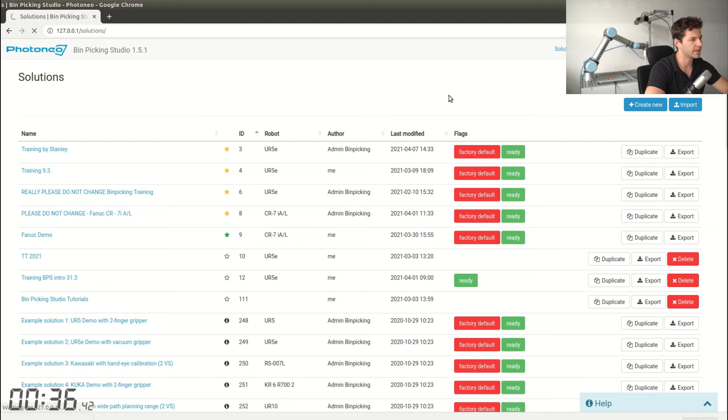It will take something like 10 seconds usually. I will provide a descriptive name, so it will be bin picking speedrun, for example. I'll omit description for now.

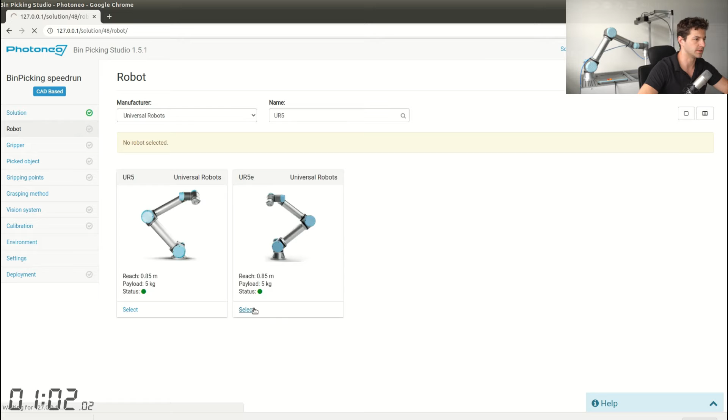The robot is actually Universal Robot UR5 and it is E-series. Inside the robot there is already a bin picking program, a simple program which will be executing functions like scan, get trajectory, execute trajectory, move to the placing position and similar.

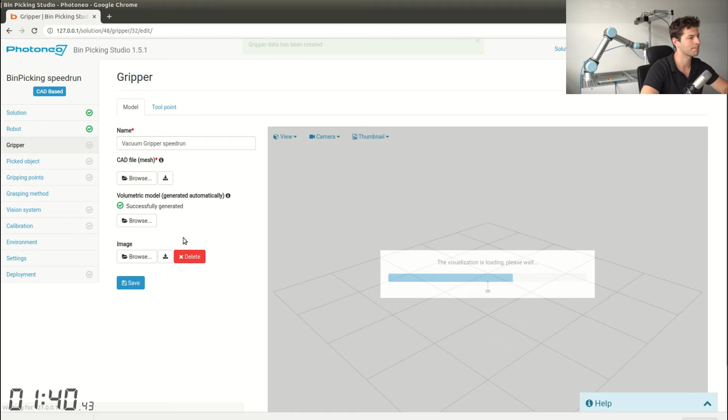For the gripper, I'm going to create a new one from scratch. It will be gripper speedrun. Maybe provide a more descriptive name like vacuum gripper speedrun, and I'm going to open up the CAD file of my gripper mounted on the robot, and here it is.

Double check if the origin of the file is on the bottom, and yeah, it's good. I'm going to use it.

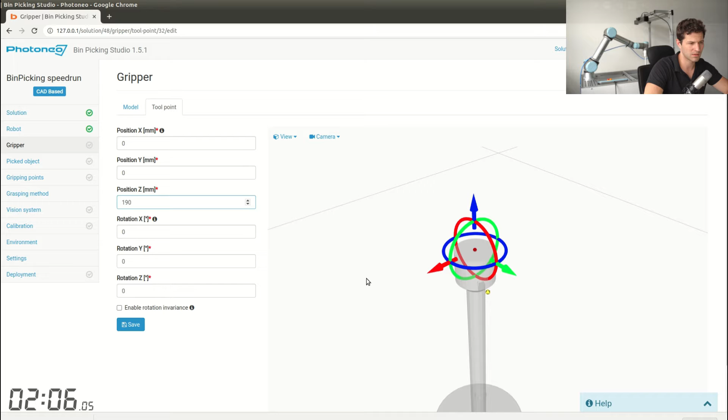To set up a tool point, I will use those arrows in here and move it to the favorable position at the end of the gripper, maybe round it up to 190 millimeters. Okay, it looks good to me as it is right now. You can see that the gripper is symmetric, so I'm going to enable rotation invariance in Z-axis and save it.

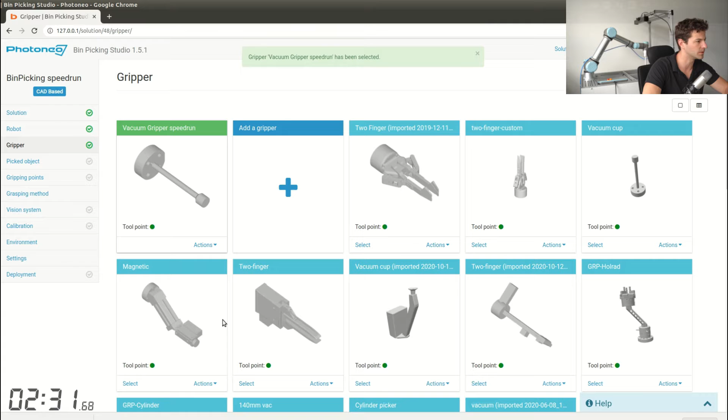For the part, I need to set up some gripping points on the surface of the part, and it's a simple process, just like for the gripper. It is a plastic T-fitting. Alright, insert CAD file and save.

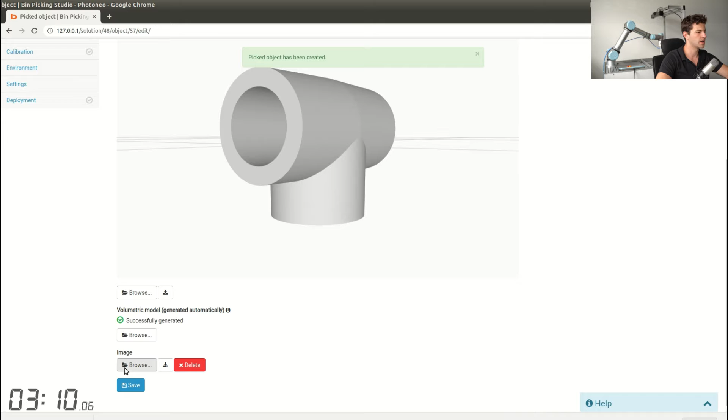Similar to a gripper, a volumetric model is generated for collision avoidance. I can examine, okay, my model is correct, and hit the save button.

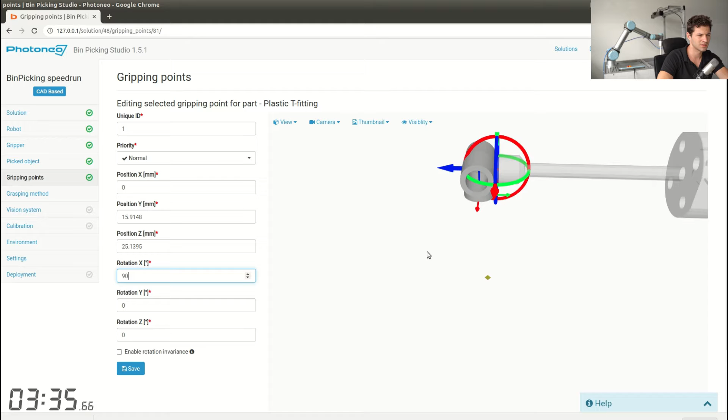For the gripping points, I'll choose my workpiece and I'll add a new set of gripping points via similar visualization. First of all, I'm going to rotate the gripper for 90 degrees, so I'm going to pick it from the side, and maybe move it a little bit in this direction and this direction, so it is in correct position, something like this. This looks like a good position for gripping.

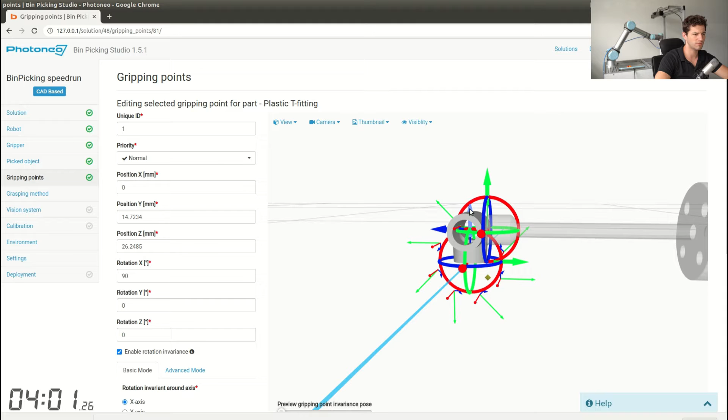Also, this piece has a little bit of symmetry itself, and I'm going to enable it, and I see it is an X symmetry, so this axis is loaded in here. I just need to move it using these arrows again to the correct position, to the center of the opening.

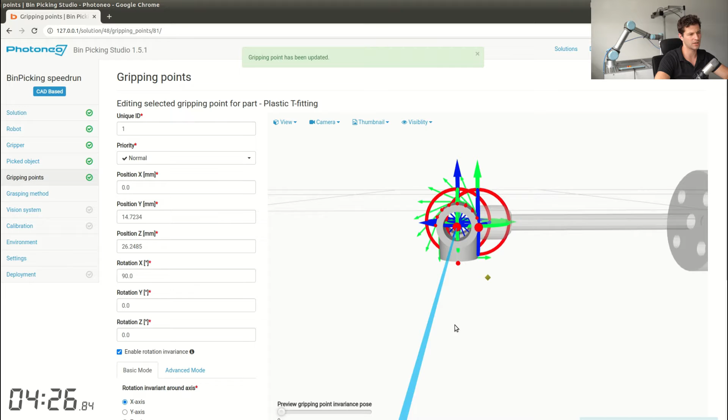Also, since I don't want to do a full rotation, just half of it, I will limit the upper limit to 180 degrees. Everything else looks good to me, and this is what I have right now.

8 different gripping points, actually 9 different gripping points all around the surface of the plastic workpiece. Hit the save, just double check, okay, it looks good to me.

Going forward, for the grasping method, we have multiple path stages. These are waypoints which are generated during the path planning, and these waypoints are like a blueprint for the trajectory. We will begin in the start waypoint, going through all of these, and end in the end position.

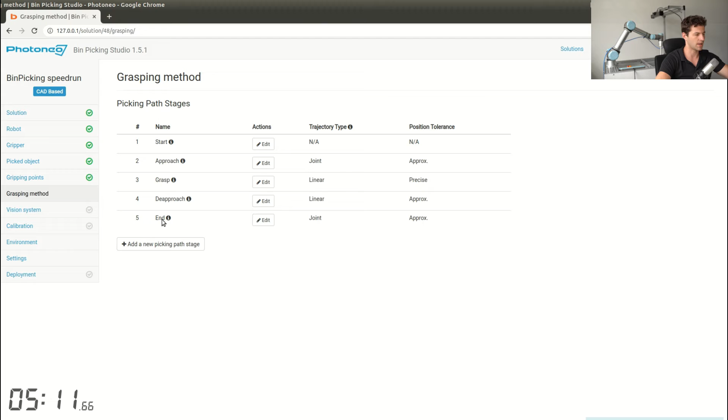Start and end position are loaded from the teach pendant and they are saved positions. So what I can do is just bind some kind of procedure to them. Detach procedure inside the robotic program is a procedure which has digital output set to 0. So I release the gripper before I'm going to do a bin picking.

The approach waypoint is the first calculated waypoint, and it will take a grasping position, something like this, and generate an offset. I'll use the coordinate space of my workpiece to generate this offset, and set it to 20 millimeters, enough in front of the object. If my object moves, this waypoint will be calculated in a different place.

What I'm going to do as well is enable attach right here, because I have a vacuum gripper, and the vacuum gripper may be enabled in front of the picking. So I'm going to enable vacuum to touch the workpiece and literally suck it into the gripper.

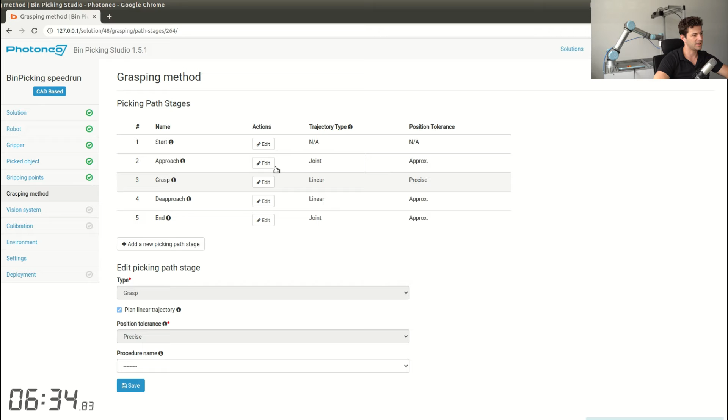Save the position. Going to grasp. Since I enabled vacuum in the approach position, I don't need to do anything else. Going to the deapproach position, and now the deapproach is the third one calculated. Actually, the grasp is calculated first, then the approach is offsetted, and the deapproach afterwards is a waypoint which serves for going out of the bin.

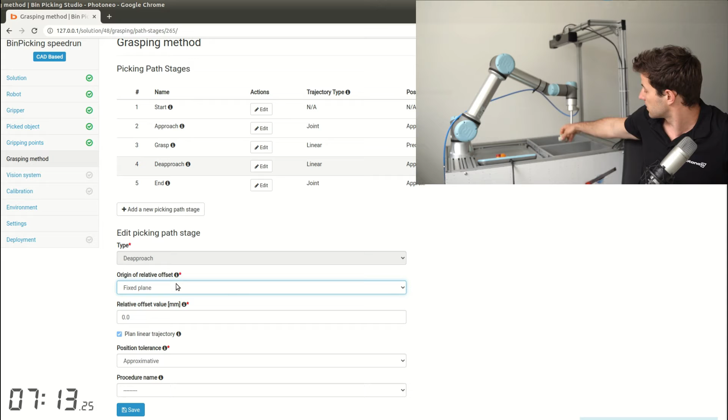Usually we use a robot coordinate system, or a fixed plane, basically an XY plane offsetted from the base of the robot by some amount. Since I want to remove the parts about 5 centimeters above the bin, and the bin ends literally at the base of the robot, I just need to put an offset value of 50 millimeters here. Very easy, hit save. So all of the parts will end up 50 millimeters above the base of the robot, which is in fact above the bin. Hit save, and that's it.

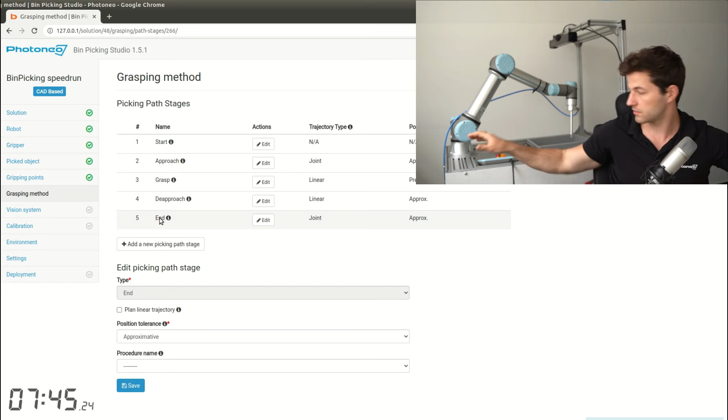After the deapproach, we go to the end position. The end position is transmitted from the robot program into Bin Picking Studio, so I don't need to do anything else. Inside the robotic program, the bin picking ends up in the end position, and then there are a couple of MoveJ commands which will just navigate the robot to the placing position, and that's it.

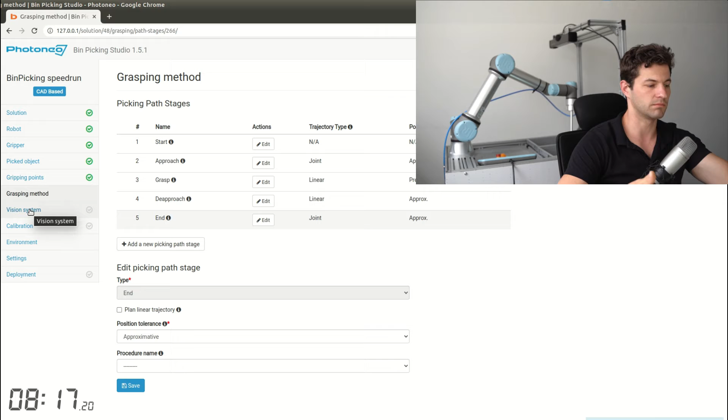So these are the picking path stages, serving as a blueprint for path planning. Combined with the environment, they will generate a collision-free trajectory.

The vision system part is used to bind together the workpiece, scanner position, and some other parameters. So I'm going to create a new vision system. We can have up to 4 different vision systems per one solution. This vision system is loaded in the background.

It will generate this form. I will put the vision system name, for this one it's 'T fitting'. The scanner ID will be used—the scanner I have attached on top of the robotic cell, which is 1709005. It is the scanner M size model, and it's based on the robotic cell. The picked object will be a plastic T fitting, since I have only one, and I need to create a localization profile.

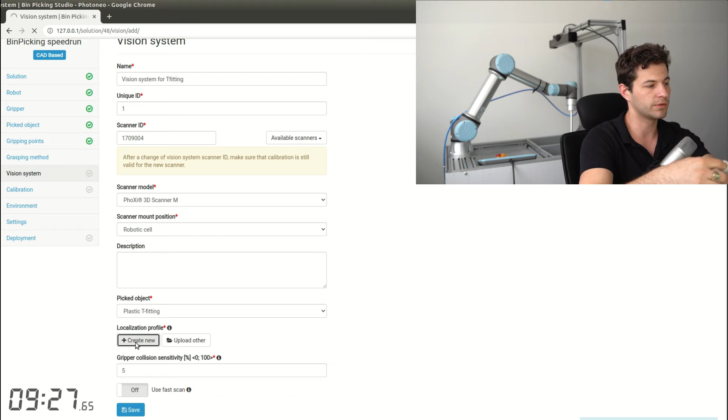This is CAD-based localization. So what's done in the background is the CAD file I uploaded into Bin Picking is loaded into the localization SDK, and when I hit start locate, the localization actually starts right now. In a couple of seconds, the point cloud from the scanner was transmitted into the studio.

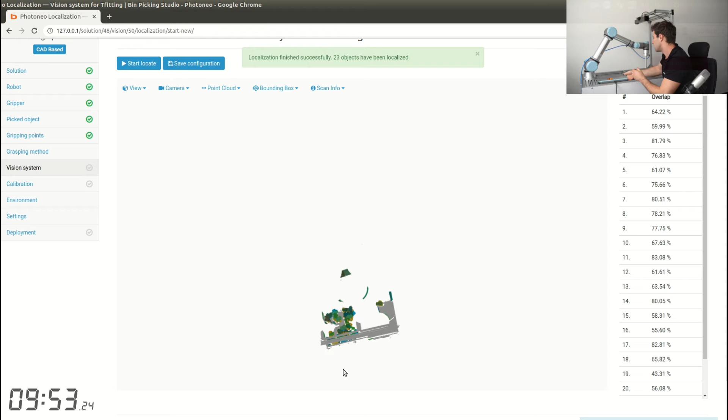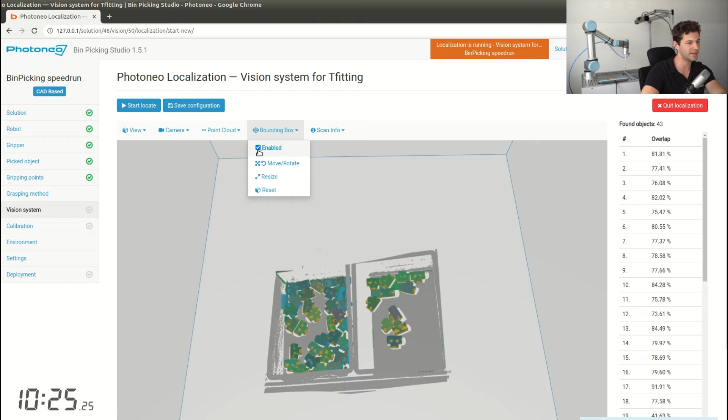Now I see the robot is blocking the view, so I'm going to move it just a little bit so we can see more into the bin. Alright, now we have 43 parts found in the first couple of seconds, and since nothing else was happening, I'm going to limit the timeout to 5 seconds only, so it won't consume all this processing power for that long duration.

Also, I'm going to enable the bounding box, because I'm going to pick only from one bin, not both. I will rotate it just a little bit, also move it to the correct position, something like this. Maybe I can also resize it to avoid any false positives.

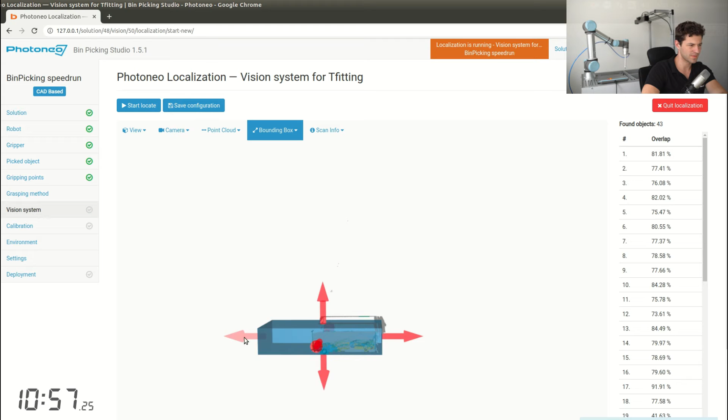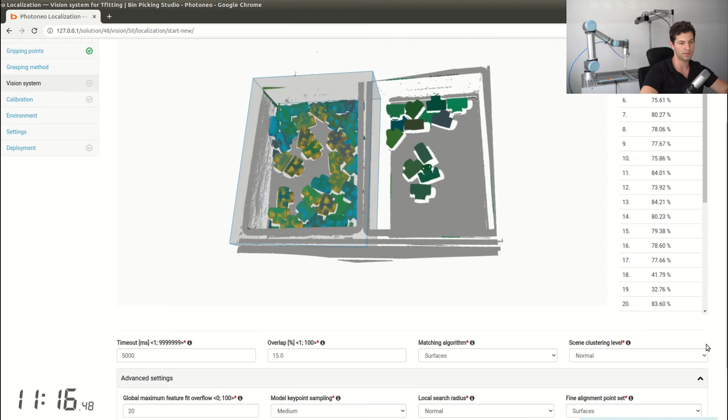Right now, when I hit start locate, you will immediately see it in action, since I have parts only in the right box, right hand side of the robot. Good, pretty satisfied with the result—out of the box settings are good. There are more settings than just these 4, but they run pretty smoothly out of the box, so I'm not going to change them right now.

I'm going to save the configuration, and once the configuration is saved, I will quit localization.

Afterwards we have the localization profile. We can set up collision sensitivity - this is a threshold of how much of the point cloud is noise versus actually colliding with the gripper. This is something you fine tune after running bin picking for a couple of cycles. I'll be using fast scan, which uses only a 2-dimensional image acquired in a fraction of a second to compare previous scans, and this can save seconds from cycle time.

Calibration metrics are pretty empty right now because we haven't done any calibration so far, but we are going to do one now. To start the calibration, I need to select the proper size of my ball, which is going to be used for calibration. And from the robotic side, I need to remove the bins and attach a ball to the gripper.

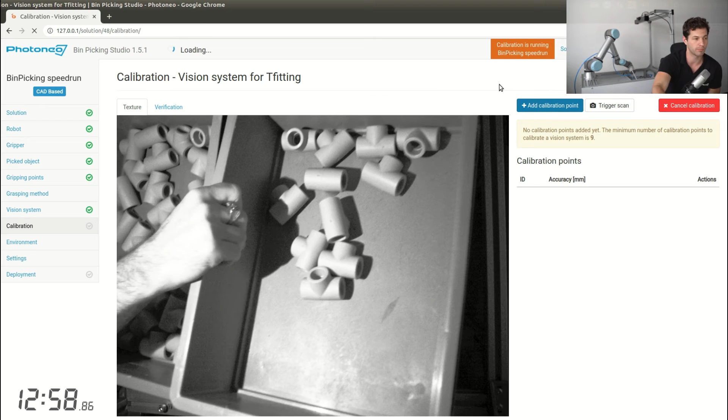My ball is attached. For calibration, I need to move the robot to 9 different locations and acquire a full point cloud from those locations. Each step is recorded in the calibration process, so I'm going to repeat this 8 more times.

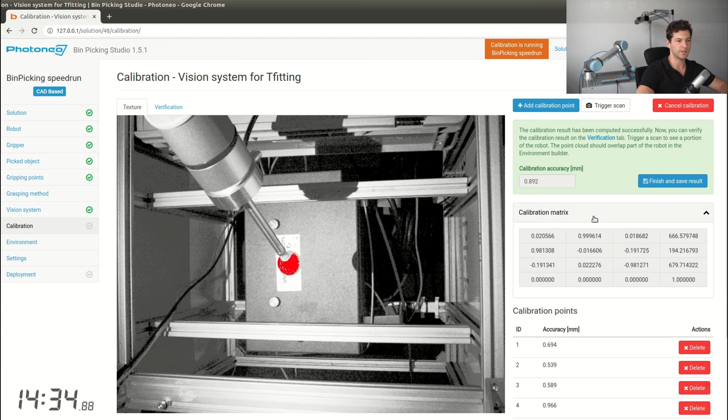I actually did one extra, unnecessary, but whatever - and now we see the result. The calibration matrix is filled in with some data, and we can also see a verification of our calibration, which is nice to see whether the calibration is really as accurate as it says. Right now it says it's 0.9 millimeters, and it definitely looks that accurate.

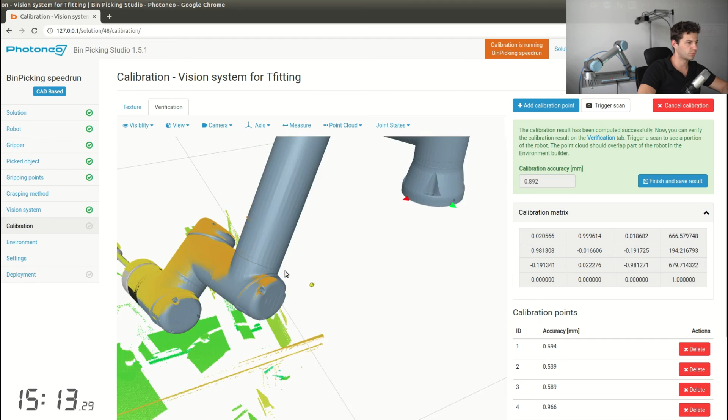There are a couple of points floating around a millimeter, but nothing spectacular. Otherwise it is matching pretty consistently the position of the robot. This was calibration done in just a couple of seconds. I am satisfied, so I'm going to finish and save the results of the calibration.

Put the pins back into the bin, into the robotic cell, and move the robot a little bit away.

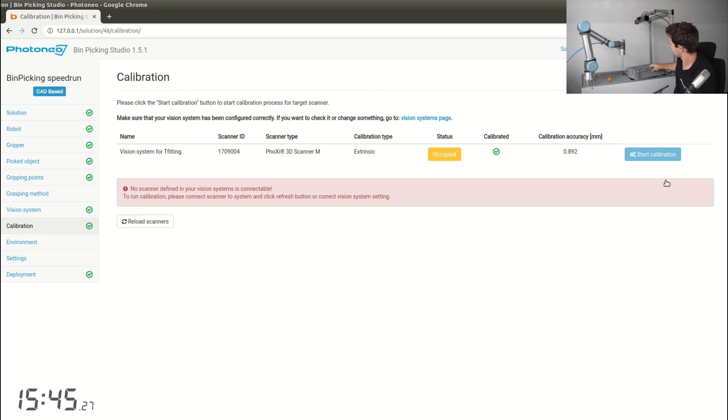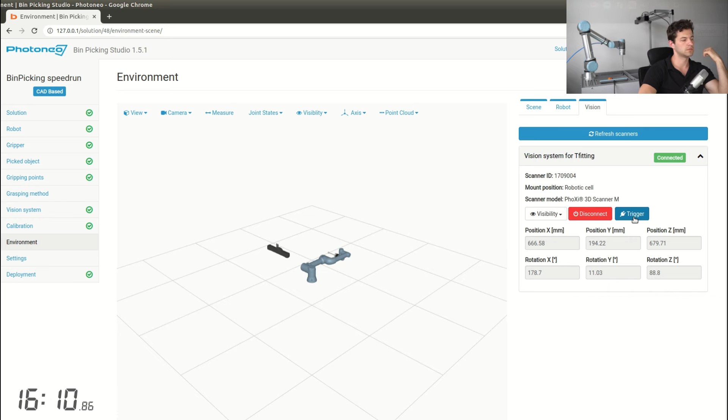For the environment, for successful path planning without collisions, we just need to upload a couple of CAD files, like the robotic cell and maybe a wall. So I'm going to help myself with the scanner. I see the point cloud here, and now I can use it as a reference for moving all those CAD files in - so it will be the cell, robotic cell.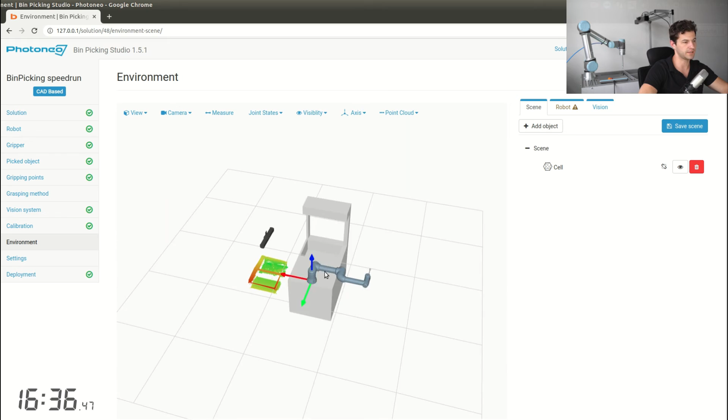It's type environment, and I see it is rotated 90 degrees, so I'm going to rotate it. You can always use these sliders. I also see it's rotated a little bit in this direction, just 1 degree or so. Okay, this is the correct position of my robotic cell.

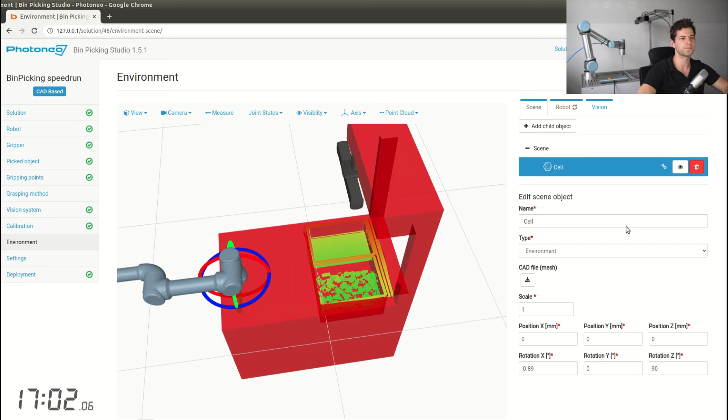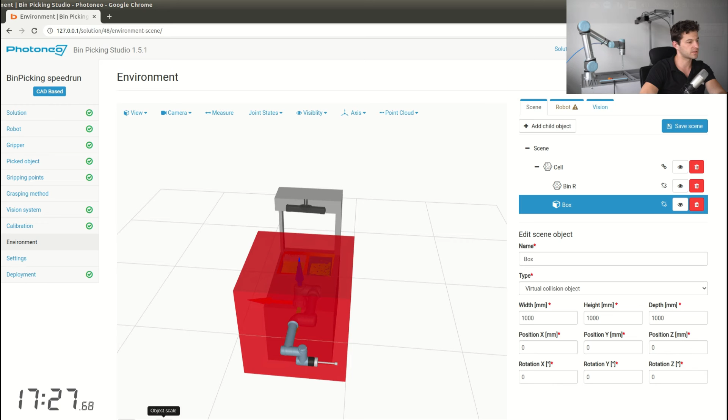I'm going to add a bin, right? Yeah, and it's already in the correct position, good. Also I'm going to add a wall behind, and I'm going to create one from a box, which is pretty simple - just move it and extend it a little bit. Good, so this is my environment.

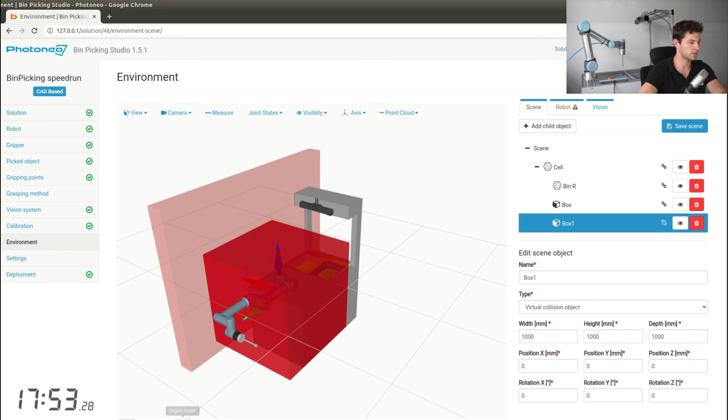Also I can create a new wall to actually guard me here, so the robot will not touch me either. Right now the robot has limited space to move on, and this is basically it.

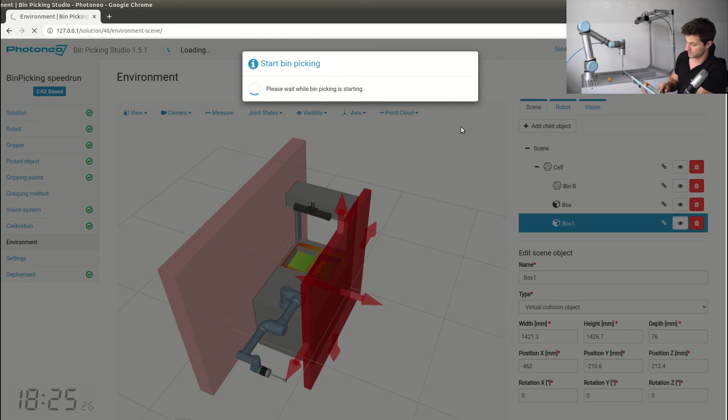I have finished the environment, every single step is finished, so I can proceed to the deployment of the bin picking. When I try bin picking the first time, I usually lower the speed to some reasonable value, like 30 or 25%, just to see if everything was set up correctly.

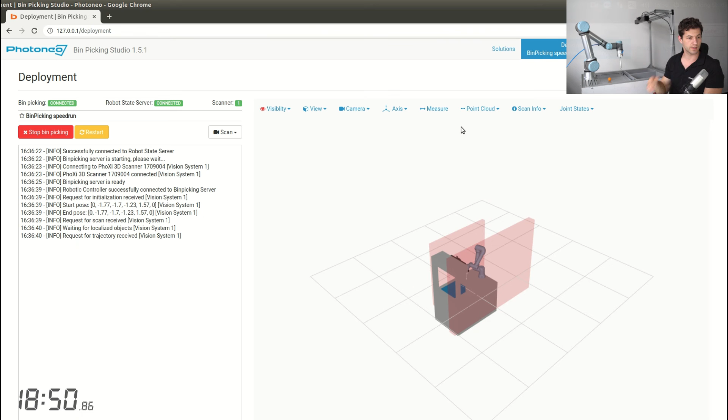Then slowly increase the speed of the robot. So right now I'm going to start the program and see how it behaves. The scan was acquired and we see parts in the bin already, and also a trajectory which was calculated for the first part.

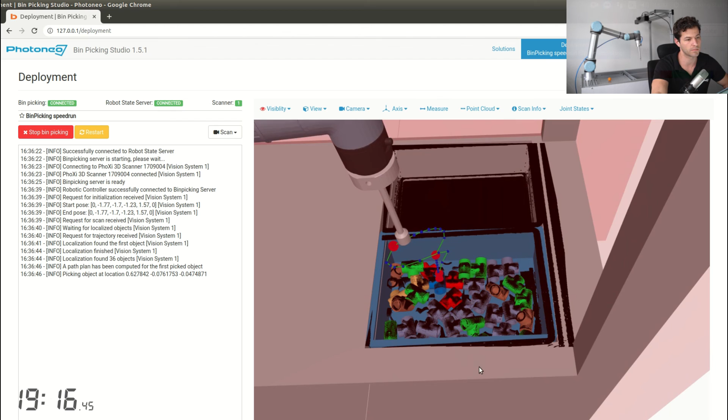You heard the vacuum, and it barely touched the part, so I know that I need to adjust the tool point just a little bit, only a couple of millimeters closer to the part, so I won't miss it.

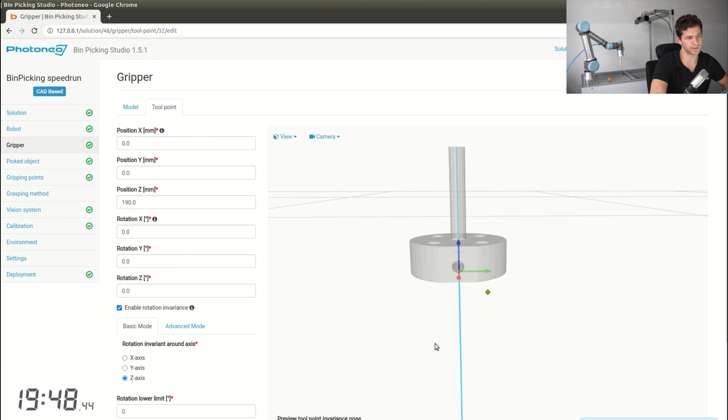Open up the project, gripper, edit a gripper, the tool point, and move it a little bit closer - like this. Save. It's always better to extend the tool point and not pick the first time, instead of going too close and damaging the gripper or the part. So I corrected that.

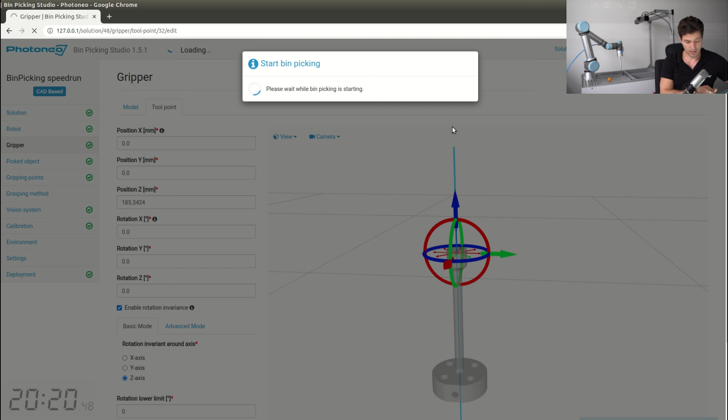And I am able to start deployment again. Cool, the bin picking is running, the scanner is connected, and I start the program.

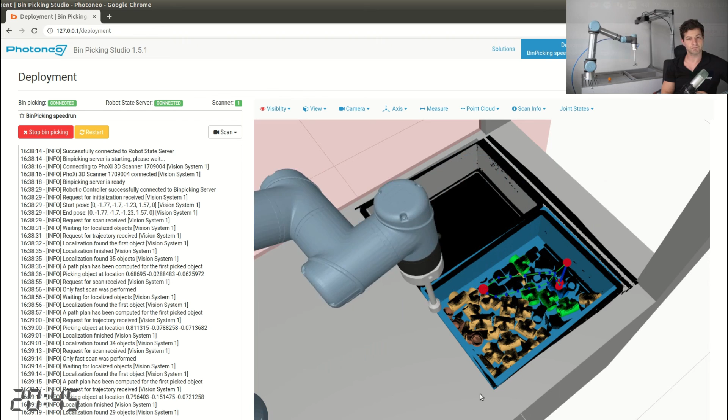Okay, I'm going to stop it here. You can see it was super fast and super easy. Well, everything was running as expected - we created the solution from scratch. I'm pretty satisfied with the results. Thank you again for watching. See you next time.